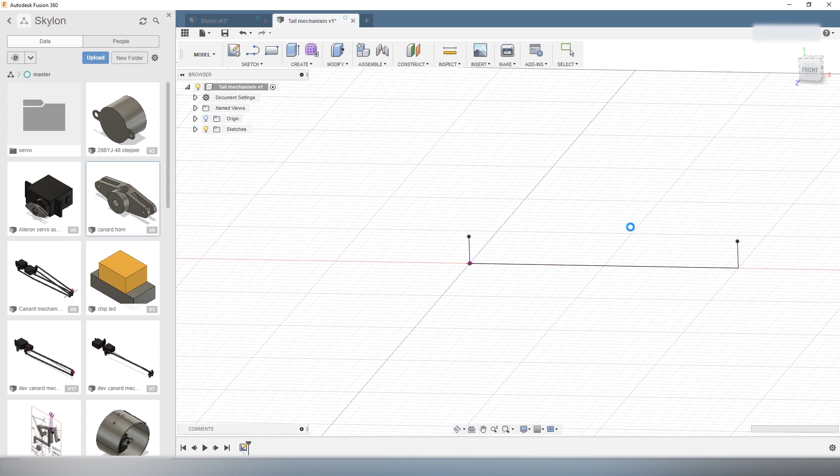Hi everyone! In this video, we will draw the mechanism which rotates the vertical stabilizer of Skylon. This mechanism is based on a push-pull linkage, similarly as what we used for the grid fins in the BFR booster. BFR booster, which has now been rebranded as Super Heavy by SpaceX.

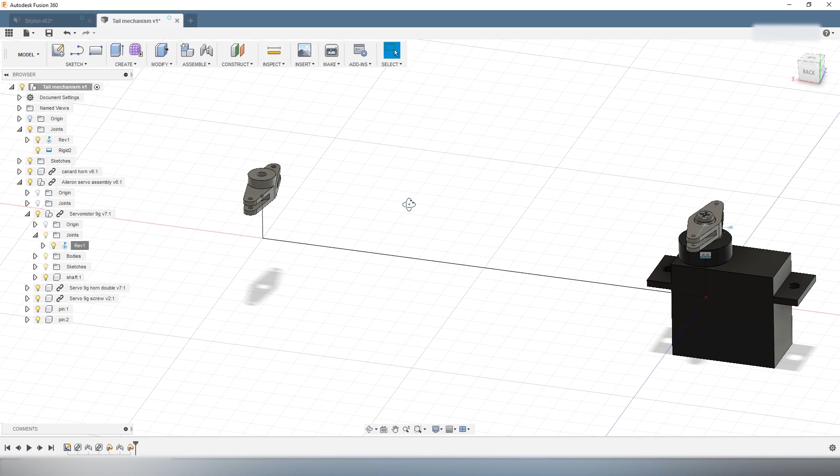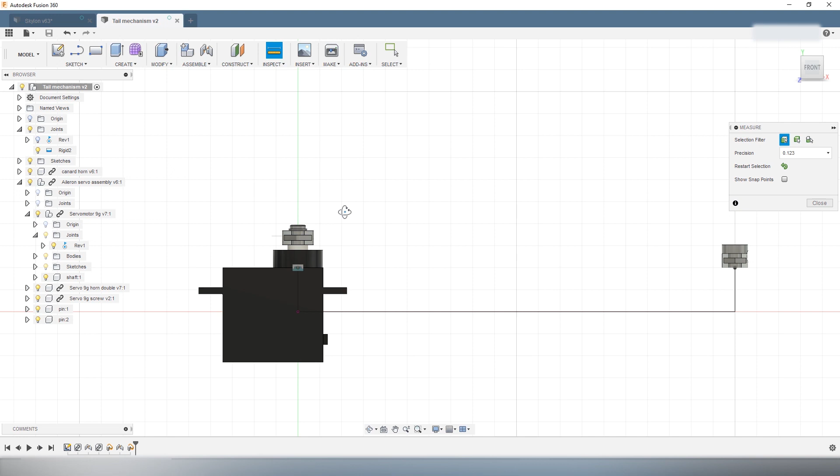So, why do we need such a mechanism in the first place? Well, what we want to do here is to connect a servomotor to the vertical stabilizer so that we can rotate it 45 degrees in both directions. However, the airframe below the stabilizer is way too narrow to fit a servomotor at this location. This is why we will place the servomotor about 8 cm ahead of the stabilizer, where the hull is wide enough. Then, we create a linkage connecting the servomotor to the stabilizer. And this is where the push-pull comes handy, because it can transmit almost a pure torque.

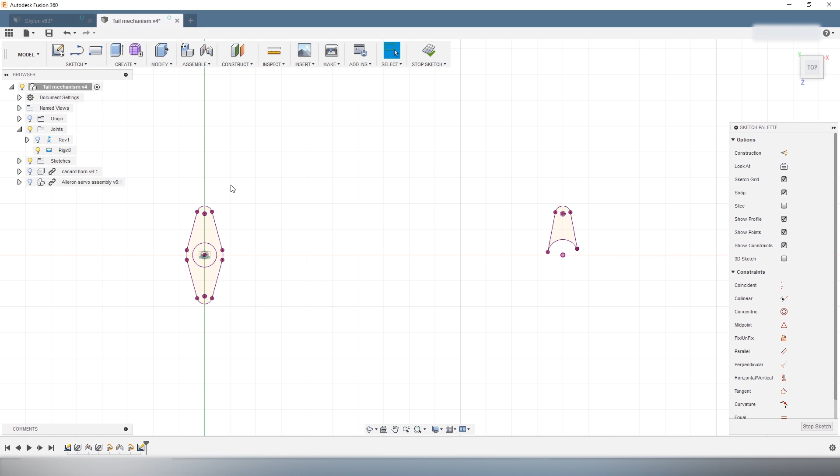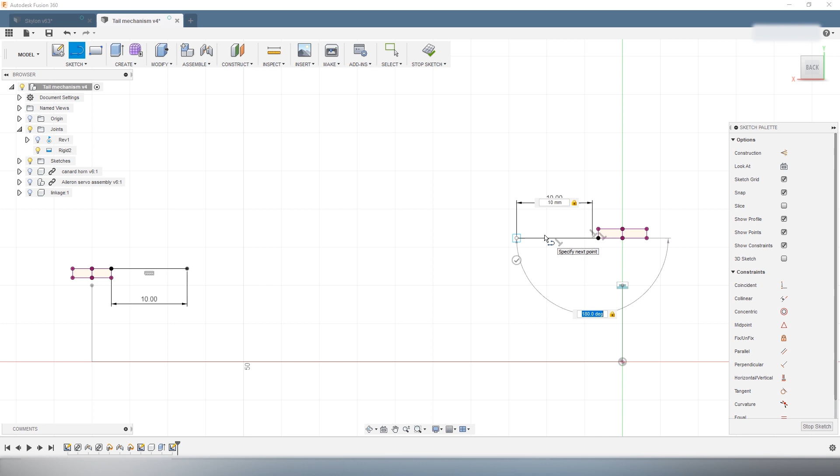The components of this mechanism are first the servomotor itself, then a servomotor horn which is attached to the output shaft of the servomotor. Then we have a second servo horn which is connected to the axis of the vertical stabilizer. And finally, the two servo horns are connected using a pair of rigid links, creating a closed geometric loop. Now the rigid links are secured to the servo horns using pins, allowing them to rotate. Seen from above, the geometric loop created by the linkage has the shape of a rectangle, but it deforms as a parallelogram when the servomotor rotates.

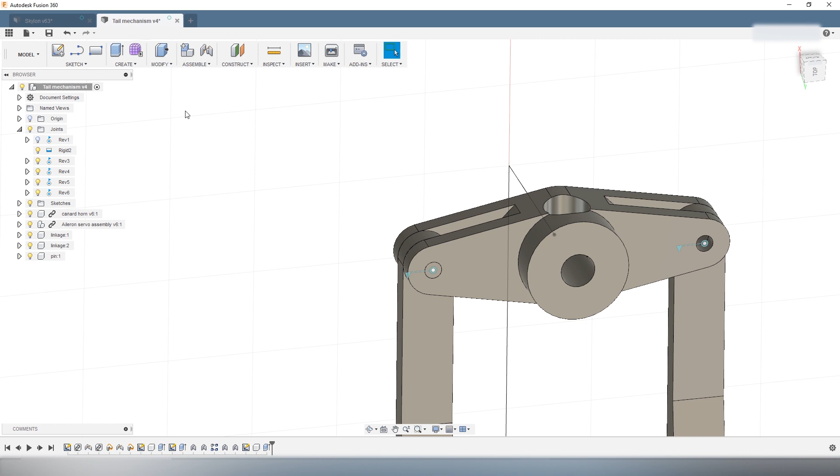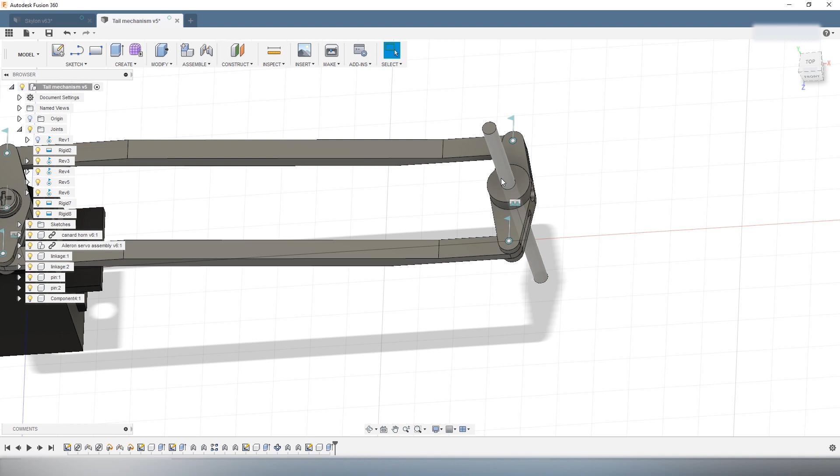As you can see, I first draw the mechanism in a separate file, and only then I insert it into the model of the ship. This avoids cluttering the screen with components that I do not need for the moment. Once I have drawn the mechanism, I insert it into the model of the ship and I check the dimensions. What I mean by checking the dimensions is, first, check that the servo horn connecting with the vertical stabilizer is actually aligned with the axis of the stabilizer. 2. Check that the servomotor has enough room to fit inside the airframe. And 3. Check that the mechanism does not come into contact with any part of the airframe when it moves.

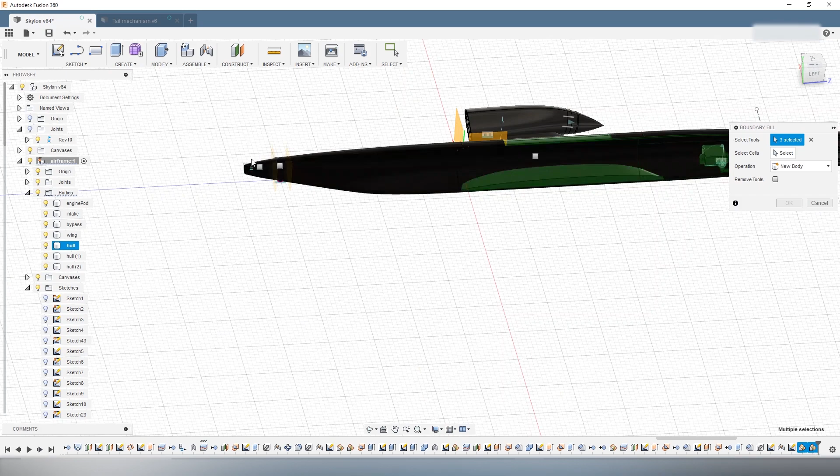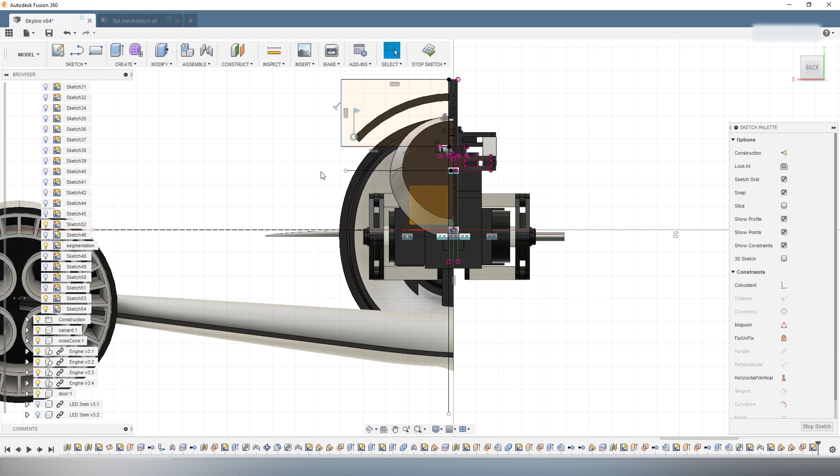Next, we need to constrain the axis of the vertical stabilizer to prevent it from moving in undesired ways. The axis itself will be made using a metal rod 2 mm in diameter. Being attached to the push-pull linkage, the axis is already prevented from moving forward or moving backward. What we need to add are walls on each side of the axis to prevent it from moving left or right, and walls, or in this case I should say floor and ceiling, to prevent it from moving up or moving down. And of course, we need to leave enough clearance between the axis and the structure constraining it, otherwise it will not be able to rotate.

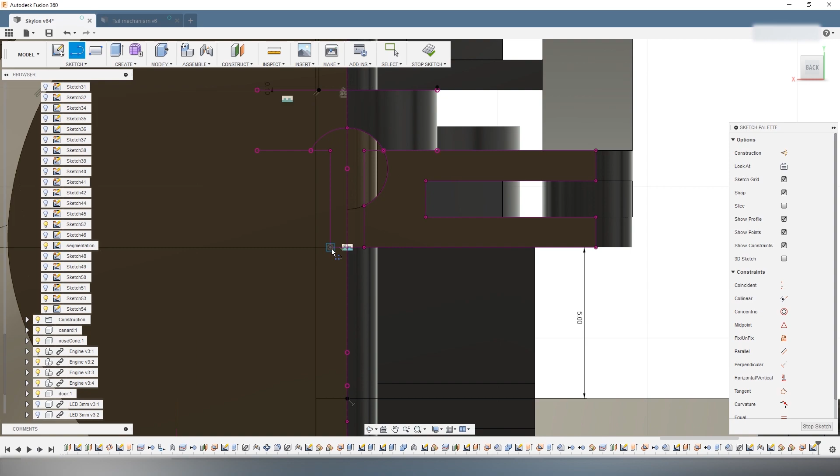Actually, since the plastic slightly shrinks during the 3D print, moving parts designed with zero clearance would just be impossible to assemble. I found that a 0.2 mm clearance between moving parts usually gives good results. And sometimes you will need some trial and error to find the perfect clearance. After that, we also need to cut out a slot in the vertical stabilizer to make room for the axis to fit.

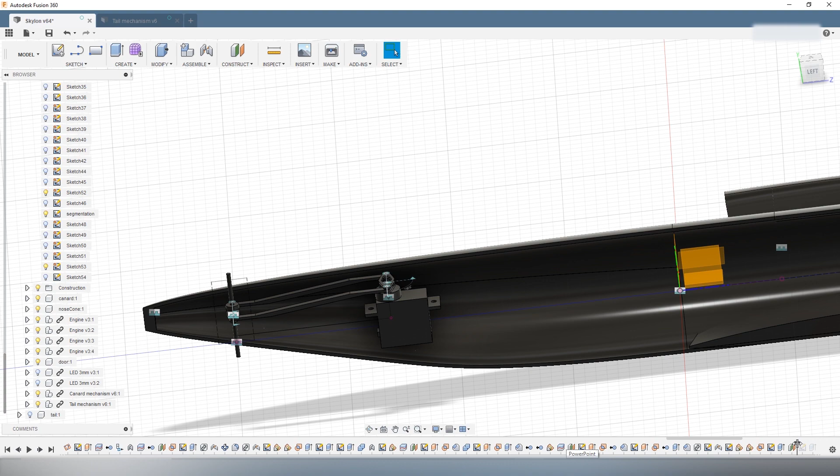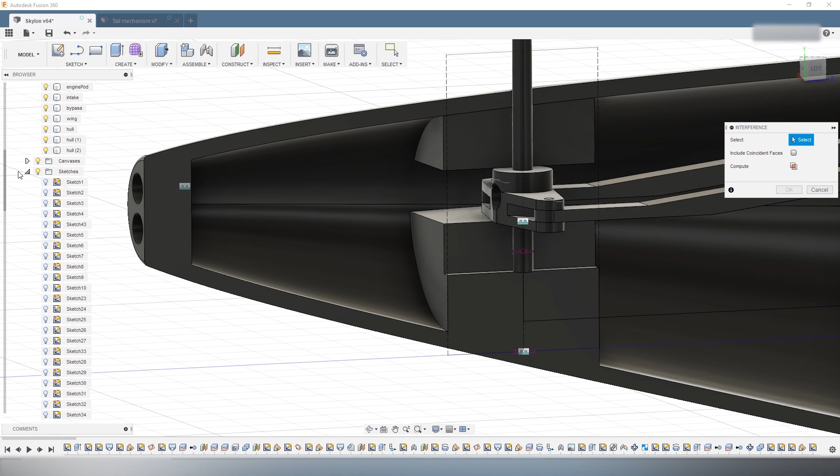When I start designing a 3D model, the first thing that I have to decide is the scale. What should be the size of the final model? And the answer is always a trade-off. The bigger the model, the easier it is to place motors inside to actuate the moving parts. But since the build volume of the 3D printer is limited, the bigger the model, the more you have to slice it into small chunks to 3D print it. The smaller the model, the easier it is to fit it inside the 3D printer, but the harder it is to stuff motors inside. So for this specific model, a scale of 1/100 was the right size to do what I had in mind. But if, for example, I wanted to add a retractable landing gear, which I did not do this time, the model would probably need to be 2 times bigger.

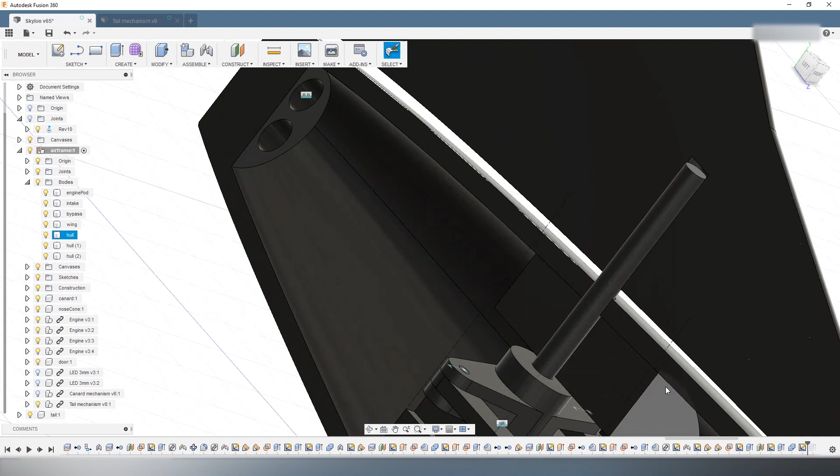So, does this mechanism work? Well, so far it's looking good. The stabilizer can rotate in both directions, so we can proceed to the next step.

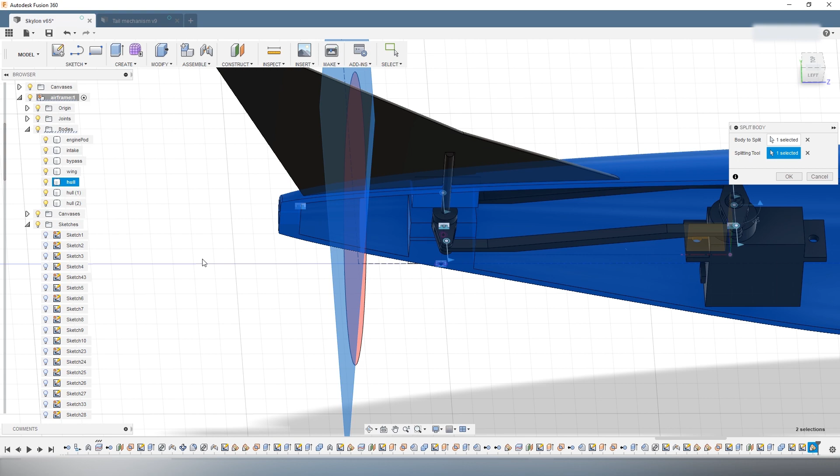When you create this kind of mechanism, there is one more thing that you have to think about. How am I going to assemble it? If you are not careful, you might end up with something impossible to assemble, and depending on your personality, you might: 1. Go back to the drawing board and rework the design. 2. Crawl in fetal position and cry in despair, or 3. Throw your computer and half-assembled model through the window. I do hope that you would choose the first option.

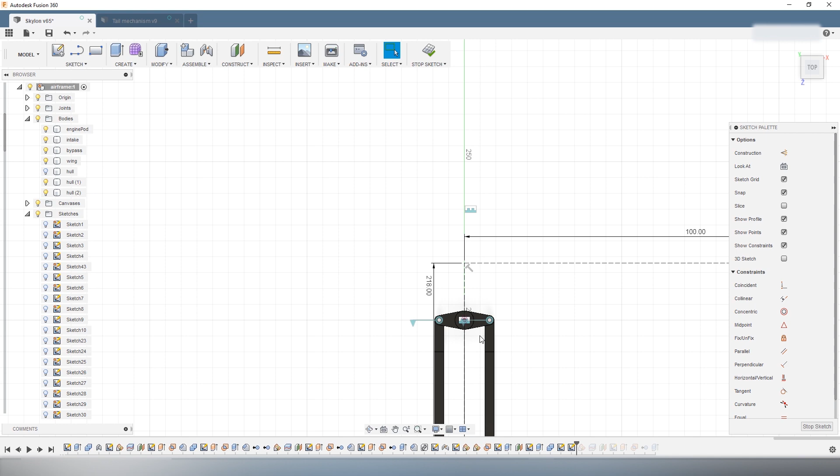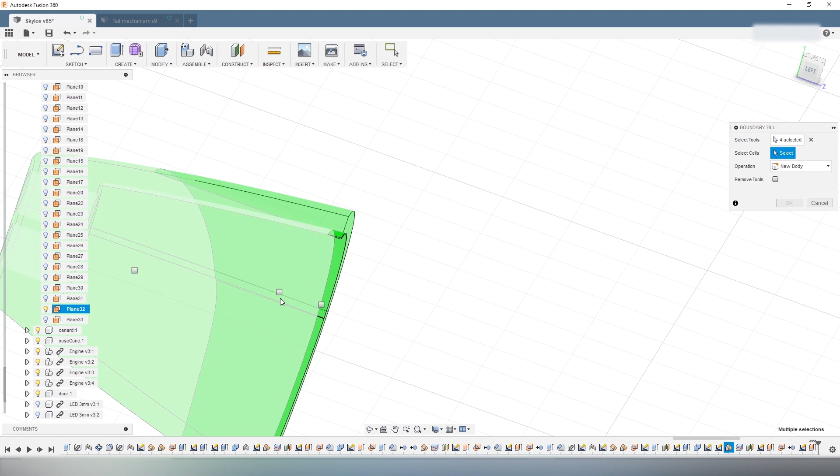In this mechanism, there is a tiny screw that secures the horn to the axis of the vertical stabilizer. So to provide access to this screw, I cut out the last few centimeters of the tail, just behind the stabilizer axis. This makes it possible to insert a hexagonal key from the back of the airframe to tighten the screw. Of course, when you segment the airframe like this, you need to add structure to hold the segments back together. This is what I call a mating interface.

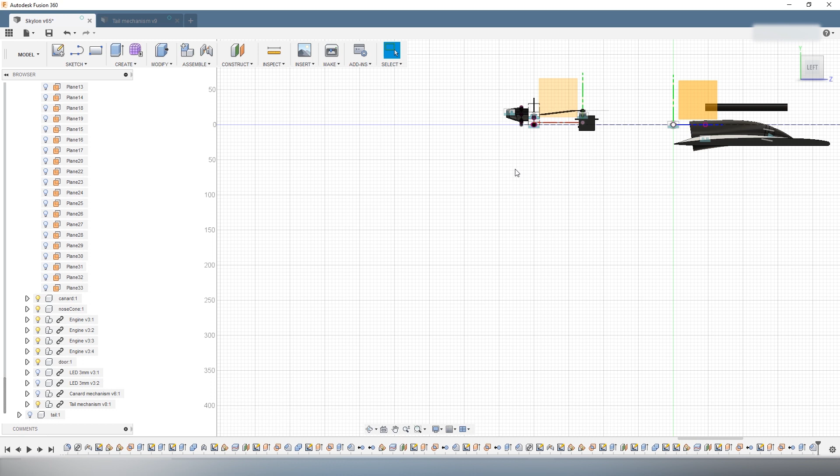In total, the airframe of this model is split into 7 segments. Now, to fit inside the build volume of the 3D printer, splitting it into 5 segments would be enough. But I need to be able to remove the tip of the tail and the nose to assemble the mechanism of the vertical stabilizer, which is located in the tail, and the mechanism of the canard fins, which is located in the nose.